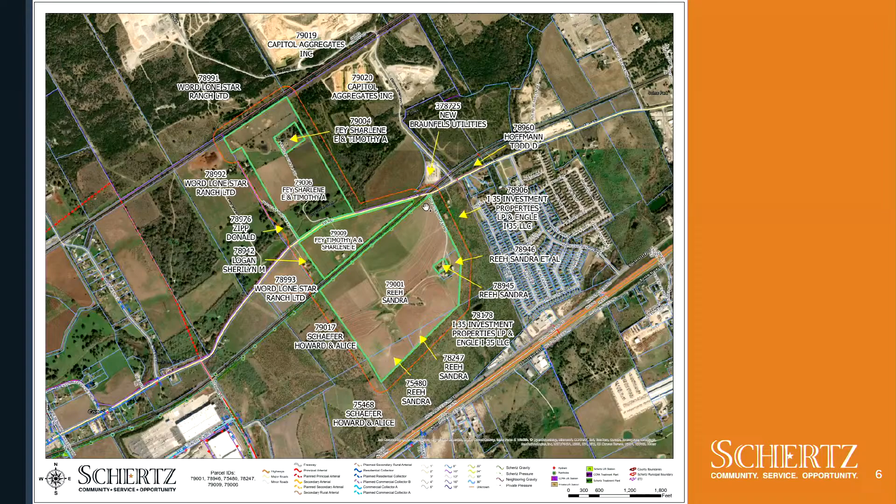There is currently no development plan for these properties. Again, it's just based on them being annexed in July and they need a zoning district established. So there are those properties. This is FM 482 to get your bearings. And then the properties here, I have another picture of it here, shows it a little clearer.

On September 19th, 9 public hearing notices were sent. We've received 3 responses in favor, and signs were placed on FM 482 on September 20th.

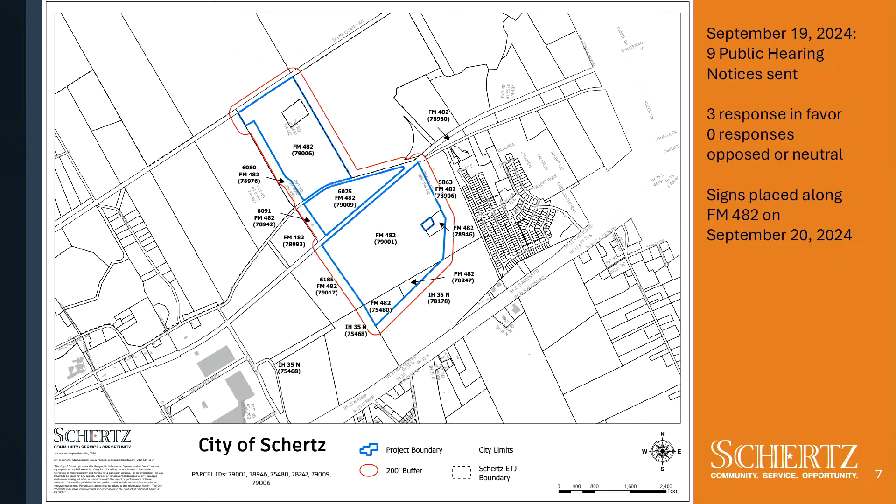So the proposal is agricultural district, which is consistent with the rest of the properties that were annexed in July. You can see the rest of the agricultural districts here that were annexed. And then, as I mentioned, part of that development agreement is the residential homestead being left under a development agreement. So that's where the DVL here is, and then this section here.

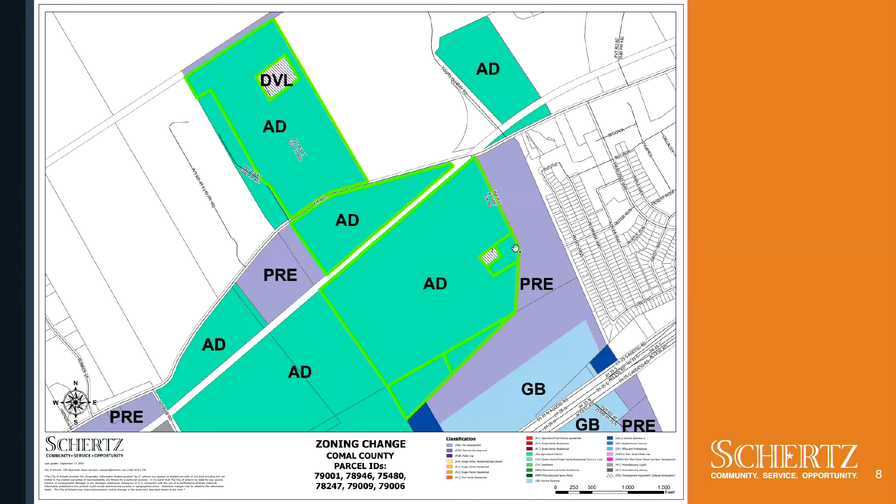So just like all the rest of the zoning cases, we look at 21.5.4.D for the criteria for approval. Number 1, whether the proposed zoning change or zoning map amendment implements the policies of the adopted comprehensive land plan, including the land use classification of the property on the future land use map.

So these properties do have 3 different land use categories. 79006 is development deferment, 79009 is local corridor, and then 79001, 78946, 75480, and 78247 are all regional corridor. Although the subject parcels have different comprehensive land use plan designations, the proposed agricultural district is consistent with the comp plan. It's also consistent with the adjacent properties and what's existing on the properties as well.

Number 2, whether the proposed zoning change or zoning map amendment promotes the health, safety, or general welfare of the city and the safe, orderly, efficient, and healthful development of the city. The city should encourage development compatible with surrounding uses, utilizing standards and transitional uses to alleviate negative impacts. The agricultural district that is proposed as that base zoning allows for agricultural and residential uses. Again, that is what these properties are being used for today.

Number 3, whether the uses permitted by the proposed change in zoning district classification and the standards applicable to such uses will be appropriate in the immediate area of the land to be reclassified. The subject parcels are currently utilized for ag, so the agricultural district is appropriate along with the properties around it.

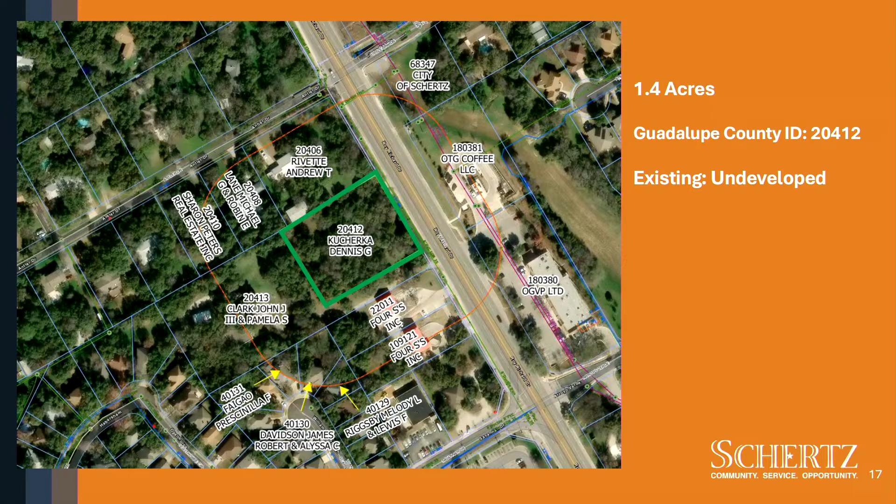So here's the subject property outlined in green. It is located along FM 3009, also known as Roy Richard. It is approximately 1.4 acres and it is located in Guadalupe County. And it is currently undeveloped.

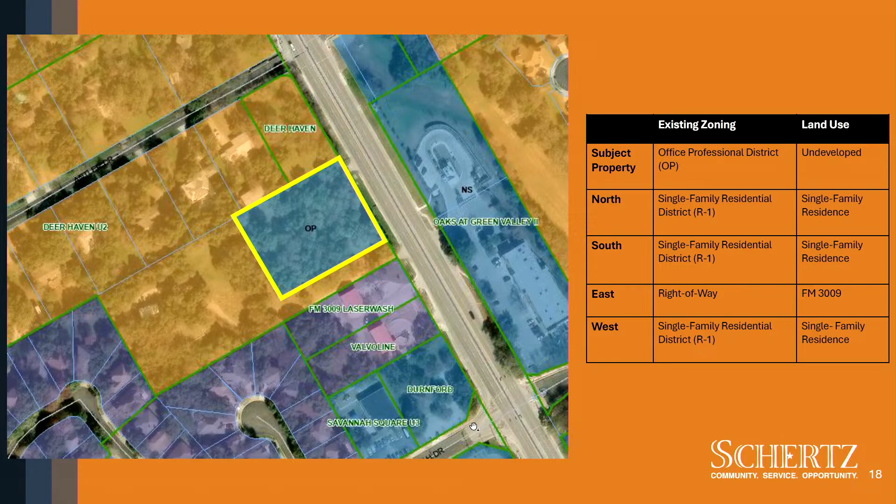Here it is again outlined in yellow. It is currently zoned Office Professional District, and it is completely surrounded by properties zoned single-family residential district that are currently being used for single-family residences. To the east is the right-of-way known as FM 3009, also known as Roy Richard. All the way up to the north is Antler Drive, and down to the south is Savannah Drive.

On September 17th, we sent out a total of 12 public hearing notices. As of October 1st, we received one in favor from the applicant, and one sign was posted on the property. It will also be posted in the San Antonio Express before City Council, and it will be tentatively scheduled for the November 12th City Council meeting.

Just so you know, you're not having deja vu. This was previously applied for a proposed zone change for the same subject property, for the same acreage, from Office Professional District to Neighborhood Services District. The Planning and Zoning Commission held a public hearing in May 2024 and made a recommendation for denial with a 5-1 vote to City Council, but the applicant withdrew the application before it could be heard at City Council.

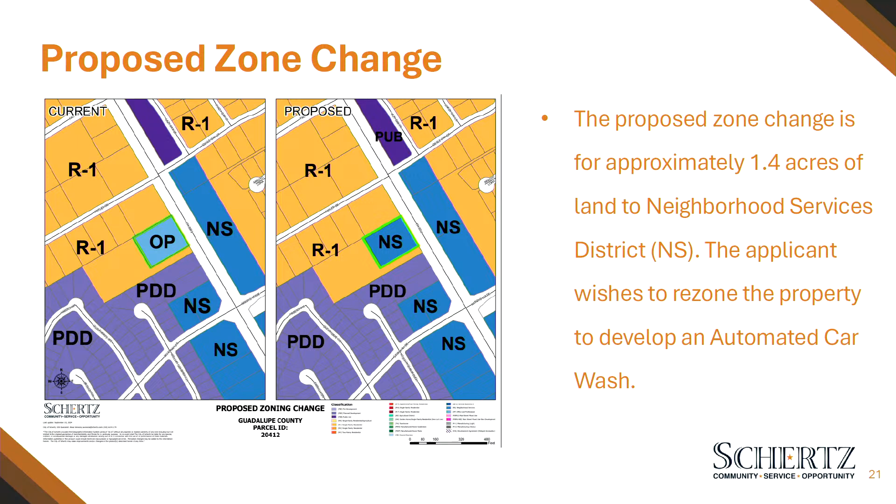The proposed zone change is for approximately 1.4 acres of land to Neighborhood Services District, and the applicant wishes to rezone the property to develop an automated car wash.

So again, staff goes through UDC Section 21.5.4.D, the criteria for approval for a zone change, and I'm going to go through those. One, whether the proposed zone change or zoning map amendment implements the policies of the comprehensive land use plan, including the land use classification of the property on the future land use map.

The subject property, outlined here in yellow with the star, is classified as local corridor, and staff believes that Neighborhood Services District does not implement the policies of the adopted comprehensive land use plan. This is because local corridor land use designation is meant to contain conventional retail centers, small-scale mixed use, multifamily development, and residential uses that are of scale and intensity compatible with the surrounding neighborhoods.

To the north, west, and south of the subject property, the properties are single-family residential district R1 and are used for single-family residences. To the east of the property is FM 3009, the subject property's only current access point. Although the subject property is located on FM 3009 and has that access, it is completely surrounded by single-family residentially zoned properties that are currently used for single-family homes.

I did confirm before this meeting that this property owner owns these 2 lots and uses them as one single lot, and he uses it for his home as well. As a result of the subject property being nestled within the single-family residences, the proposed zone change to Neighborhood Services District is not compatible.

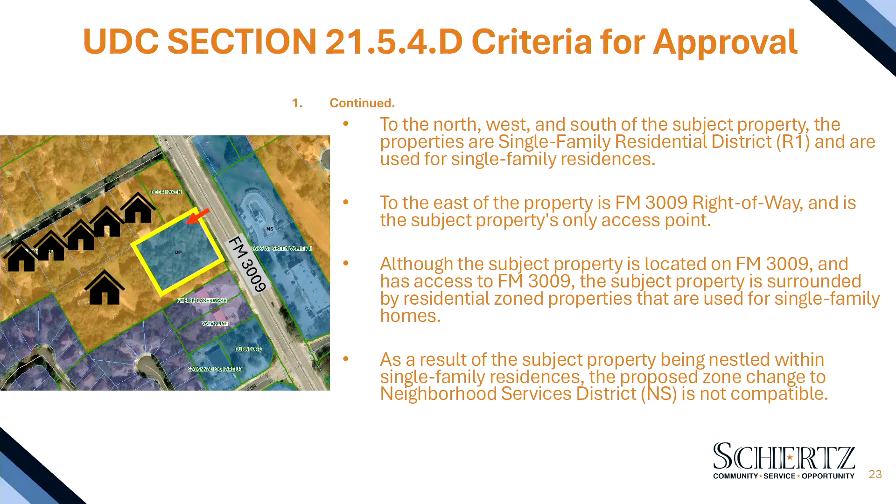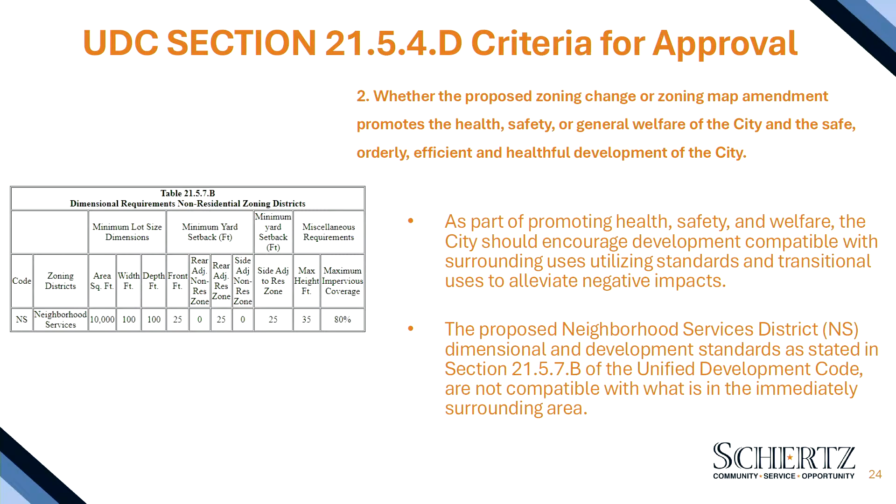Two, whether the proposed zone change or zoning map amendment promotes the health, safety, or general welfare of the city and the safe, orderly, efficient, and healthful development of the city. The proposed Neighborhood Services District dimensional development standards, as stated in Section 21.5.7.B of the UDC, are not compatible with what is in the immediately surrounding area. The existing Office Professional District is more compatible with the immediate surrounding area, as it is the least intense commercial zoning district we have currently.

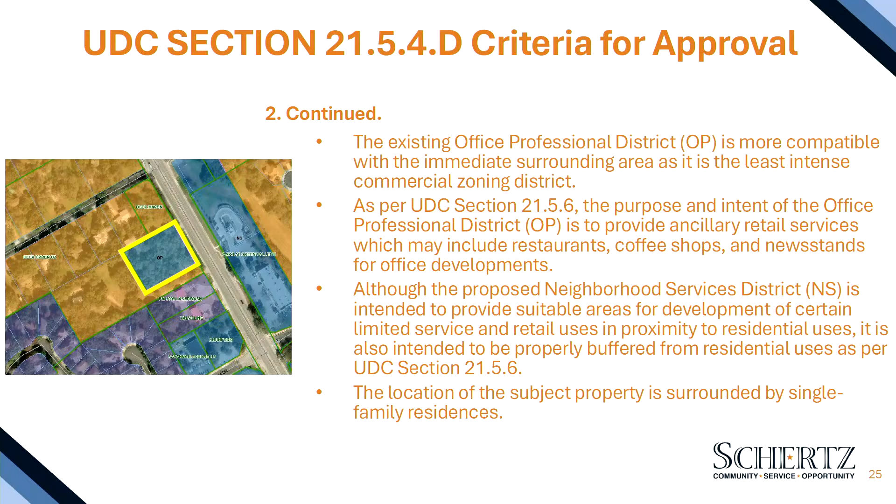As per UDC Section 21.5.6, the purpose and intent of the Office Professional District is to provide ancillary retail services, which may include things like restaurants, coffee shops, and newsstands for office developments. Although the proposed Neighborhood Services District is intended to provide suitable areas for development of certain limited services and retail uses in proximity to residential uses, it is also intended to be properly buffered from residential uses per UDC Section 21.5.6, but the location of the subject property is completely surrounded by single-family residences.

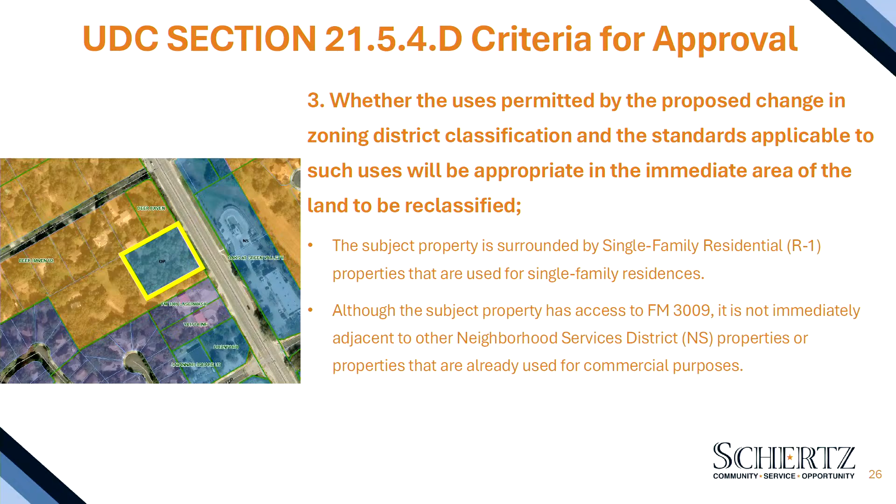Three, whether the uses permitted by the proposed change in zoning district classification and standards applicable to such uses will be appropriate in the immediate area of the land to be reclassified. Again, the subject property is completely surrounded by single-family residential district properties that are used for single-family residences. Although this subject property does have access to FM 3009, it is not immediately adjacent to other Neighborhood Services District properties or properties that are already used for commercial purposes.

Criterion 4: whether the proposed zone change is in accord with existing or proposed plans for providing schools, streets, water supply, sanitary sewers, or other public services and utilities to the area. The subject property and surrounding area is serviced by the City of Schertz for water and sewer, and along FM 3009 there's an existing 12-inch water line and 8-inch sewer line.

FM 3009 is a TxDOT road classified as a principal arterial with a planned 120 to 130 foot right-of-way width. The subject property has an existing curb cut on FM 3009, but any proposed driveways will need to be reviewed by the City of Schertz Engineering Department and TxDOT.

The City of Schertz Police, Fire, and EMS departments have reviewed the proposed zone change. The police department expressed concerns regarding the potential number of vehicles within the automated car wash, in relation to stacking on site and potential traffic flow issues, including overflow onto FM 3009. The applicant did not submit a conceptual or proposed site plan with their zone change application submittal, so we could not respond to the police department's concerns.

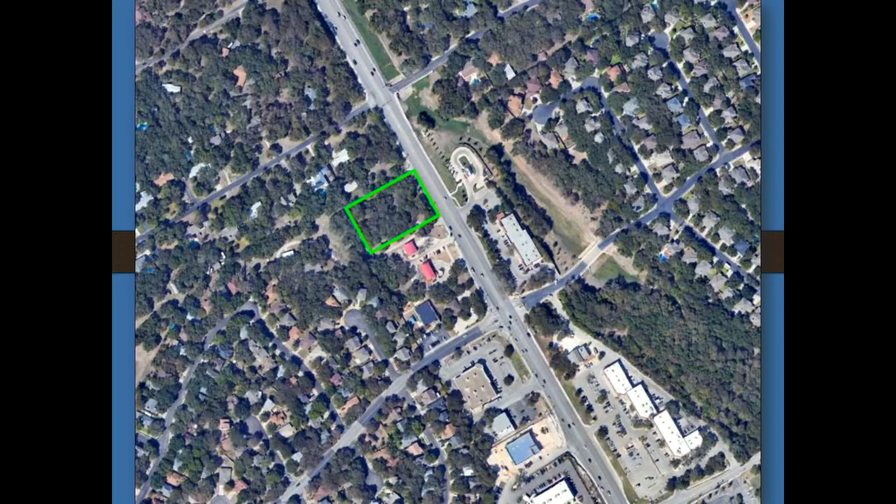As far as the zoning, and as was mentioned several times, almost every slide was that we're surrounded by residential uses and residential zoning, which technically we are surrounded on three sides by residential zoning, but that I really don't think tells the whole story. As you see here, the residential zoning to our south is a driveway that was created for the home that's set back pretty significantly off to our rear, off to the west. That has been in place since these properties were subdivided and kind of broken up way back when. It is not a home by any means, although it is a driveway to a home.

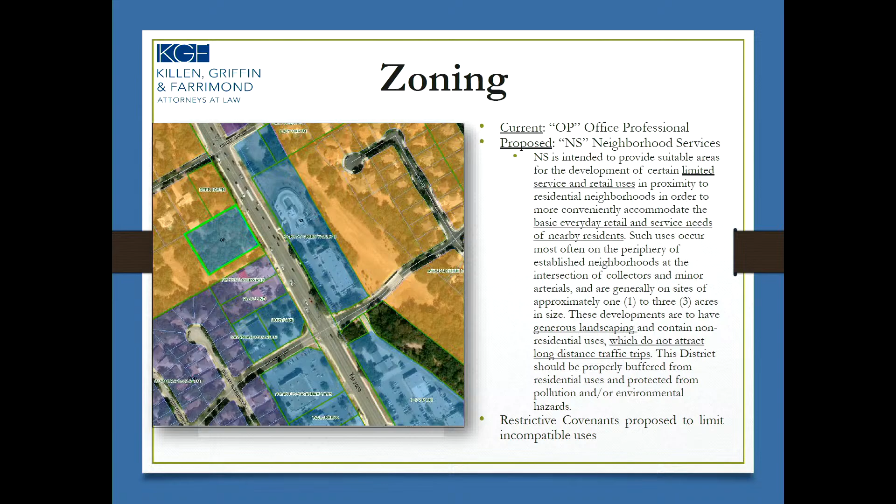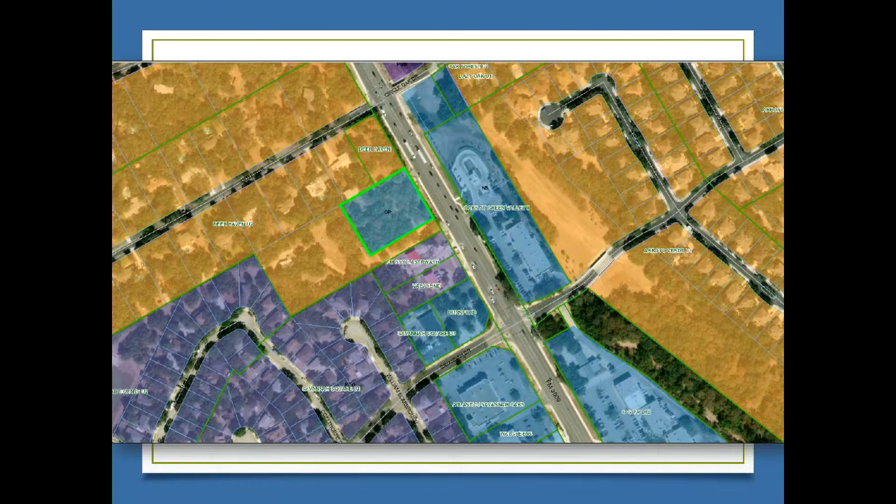There you go, looking at the zoning map again, you see, although we have orange all around us, really what's more definitive, or representative I guess I should say, of the area of this property and surrounding properties is neighborhood services, commercial retail that supports the neighborhoods setback further off.

So here are some actual details, and this is our more technical site plan. Have a better illustration to show the buffers and landscaping proposed as well. But you see here, small building, 4,000 square feet in total, 26 parking spaces, plenty of room, and really they design it to make sure that even at its busiest, there's no stacking anywhere close to the driveway, and they have good circulation and run an efficient operation there where you're really only there for a few minutes.

I mean, it is. I go through one actually probably once or twice a week on my way into the office every morning. It's a 5-minute detour that gets the car clean.

Maybe some of the more important details here: all around the perimeter there'll be a 20-foot minimum landscape buffer, a significant amount of trees and other landscaping going in on all 4 sides. The code also requires an 8-foot masonry wall where abutting residential, so because of that residential zoning district we abut on all 3 sides, even though there's not homes everywhere on each of those sides, 8-foot wall, 20-foot landscape buffer.

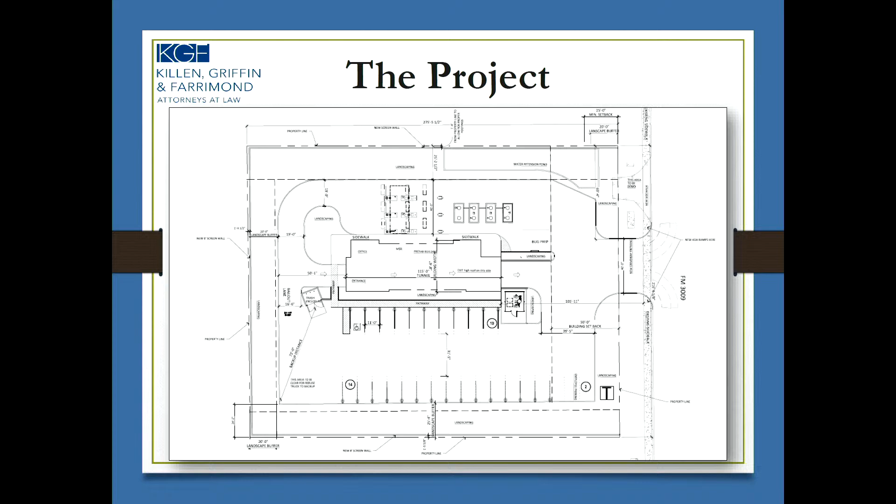Basically, you will not be able to see this use in any regard from the neighborhood, from adjacent properties. That grade really adds some additional buffers in addition to the landscape buffers, again 20 plus feet. So really kind of who you would want as a neighbor if the site is to be developed.

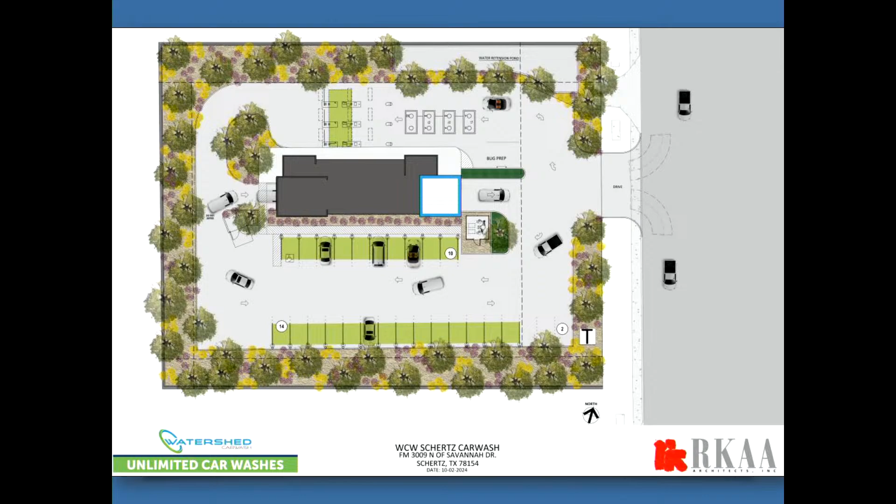Here's a better picture of it, kind of showing what those buffers look like all around, as well as the landscaping throughout, up against the tunnel itself, and tree preservation and additional planting really everywhere we can, but most importantly along the entire perimeter of the site.

A little bit more details: about a 4,000 square foot building, express car wash, 120-foot tunnel. You have 24 vacuum stalls. Rarely are they ever all full at one time.

Hours of operation: they open up at 7 a.m., they close at 7 p.m., or earlier if the sun goes down. Basically it's the earlier of 7 p.m. or when the sun goes down. When they close, the site is secured, the lights are off. If there ever is the need for lighting, it is all dark sky compliant, downward lighting. But again, everything shuts off really when the sun goes down.

Couple quick items on environmental benefits: currently over 50% water is reclaimed. WCW, Watershed Car Wash, has just engaged, embraced some new technology. If this gets approved, this will be one of the first sites in the area to use this, and it's basically 100% water reclamation. Right now the typical car wash spends 50 plus gallons for each car that is washed.

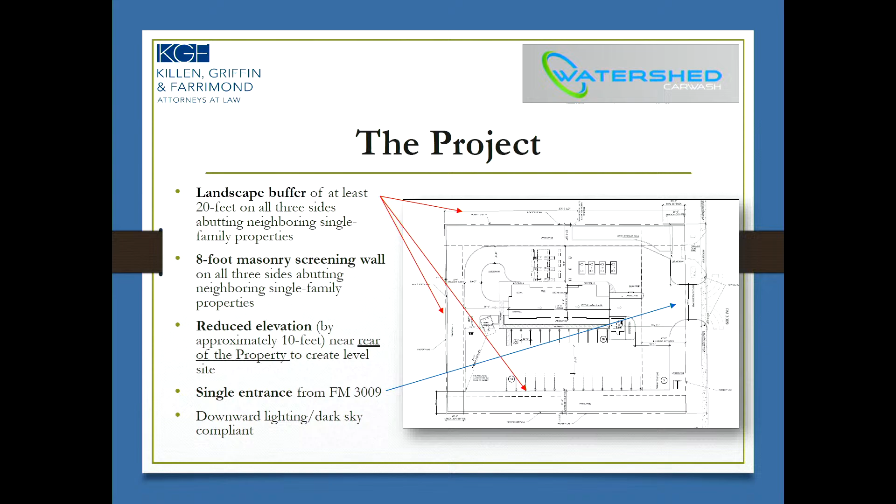Here are more of the back details, probably already went over so won't dwell here too long, but you can see where those buffers are, where that 8-foot masonry wall is, and just how well buffered we are, both from the primary arterial of 3009, as well as residential areas kind of off to the west.

Here's what I mentioned earlier: there is some concern about some potentially undesirable uses that are otherwise allowed in neighborhood services. We intend to do a car wash, want to do a car wash, and we strongly believe there's a need and that it's compatible. So we're willing to file in the deed records that'll run with the property, regardless of who owns it in the future, however many years down the road, that you can't have maybe what might be considered some of those more intense uses like auto parts sales or even a drive-in, group home, convenience store, those sort of things.

That's my last slide, so happy to answer any questions. Really appreciate y'all's time and willingness to reconsider this.

This, again, not to repeat myself too much, but this really is a compatible use. FM 3009, as I think was mentioned earlier, one of the quotes from the future land use plan focusing on 3009 is that it serves the local needs of residents and the surrounding neighborhoods. And that's what we're trying to do here. That's the neighborhood services zoning that we're requesting, and that's the use that we're requesting as well. It's a low intensity use, again serves the neighborhood, consistent with the neighborhood plan, significant landscaping, buffering, masonry wall.

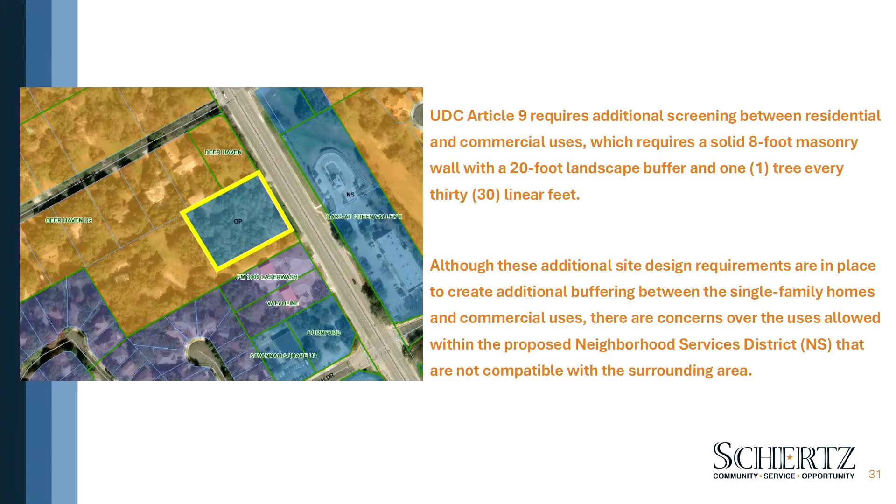But I think another thing to point out, Commissioner Wallace, is even if you look at the properties across 3009, sure they're neighborhood services, but the residential is just to the rear. This is one of the few properties on 3009 that has residential on a side. So the neighborhood services make sense if residential is just to the rear, it acts like that buffer between 3009 and the residential. But this property, it may seem like it's just surrounded by residential, but that is a key piece that differentiates this being office professional versus the neighborhood services on the rest of 3009.

Okay, y'all, just a general question. So let's say the office professional was kept, can you do a conditional use? So could you do an office professional with a conditional use for car wash, or a conditional use for a specific item? So we would have to rewrite the UDC for something like that. That would be something y'all would have to request if that's something you want staff to look into. Okay, so you're stating now that we couldn't make a conditional use. So we couldn't do a conditional use currently?

As the UDC is written, neighborhood services is where car wash automated is allowed by right in a zoning district. If you want us to amend the UDC so that we permit with an approved specific use permit, car wash automated within office professional district, then we can look into that UDC amendment. Yeah, Clay, I think you're looking too deep, the answer you're getting is no. A car wash is not allowed in OP, there's no specific use permit. Correct. Okay, okay.

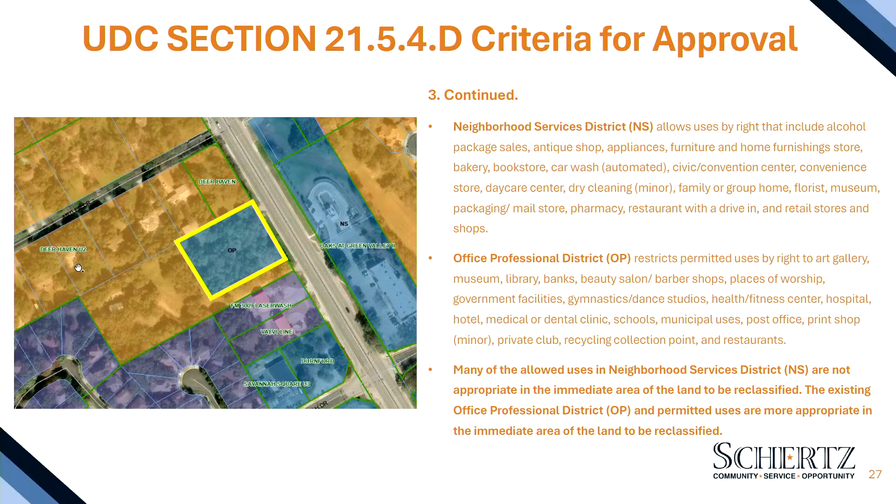So it's two residences it affects: the one that owns the corner lot of Deer Haven, and the one home that's way set back off to the back, with a long driveway. Is that correct? So this driveway belongs to these people, and then this individual, and then these people as well.

Let's see if I can pull up the buffer map. So all these people are within the 200-foot buffer, and these people also as well within that PDD.

So the previous car wash that's now the inspection station for Take 5, that also had those residences to the rear and had the driveway. So it was also residential on the back and on the side there.

Well, as she explained earlier, Savannah Square is a PDD, and those two lots, the Take 5 and the Laser Wash, they are part of that Savannah Square PDD, correct? And that PDD specifically allowed oil change places and car washes. That was in the PDD. So that was not subject to city review or approval once the PDD got approved.

And that all was done - well, we moved in '89, but I think the subdivision was probably done around '85-ish. Does that sound about right? Somewhere in there.

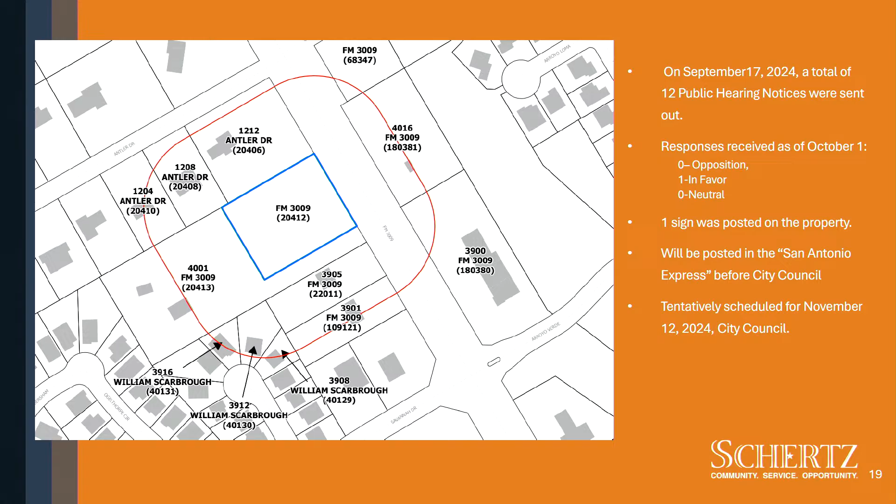Yeah, jump on in here, Audrey. No residents replied to the notices? So not at this time, but they do have until the Friday before the first hearing at council at noon.

That didn't seem to make sense. I'm just saying. So we don't know whether they'll respond or not. Right. Per UDC, we give them until the Friday before the first hearing of council to respond to the public hearing notice. So it's not just like a week or two to respond.

Okay. But not prior to us taking up the zoning. Well, Roderick, I think, sir, one of the differences is this property takes its access right directly from 3009, whereas one of the others we looked at where the room was full of people, the only access to the property was off Antler, I believe - or no, not Antler, the next one. Because Antler is where the traffic light is.

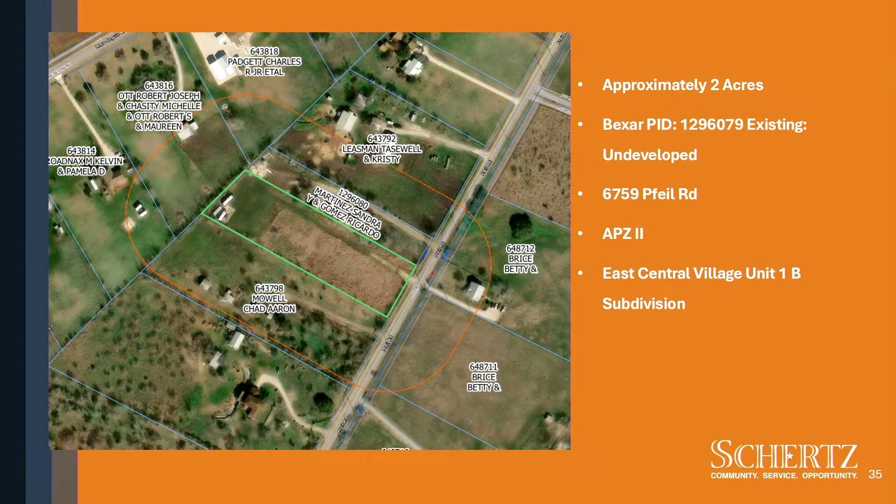Here's the subject property outlined in green, approximately 2 acres. It is currently undeveloped. It is located in the APZ2, and it is currently platted, and it is part of the East Central Village Unit 1B subdivision. It is currently zoned single-family residential agricultural district, and the surrounding properties are also zoned single-family residential agricultural district and are used for single-family residences.

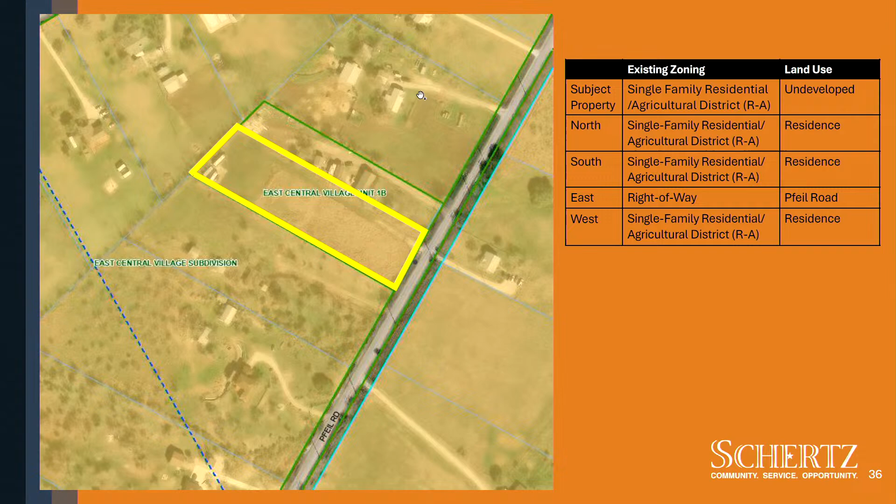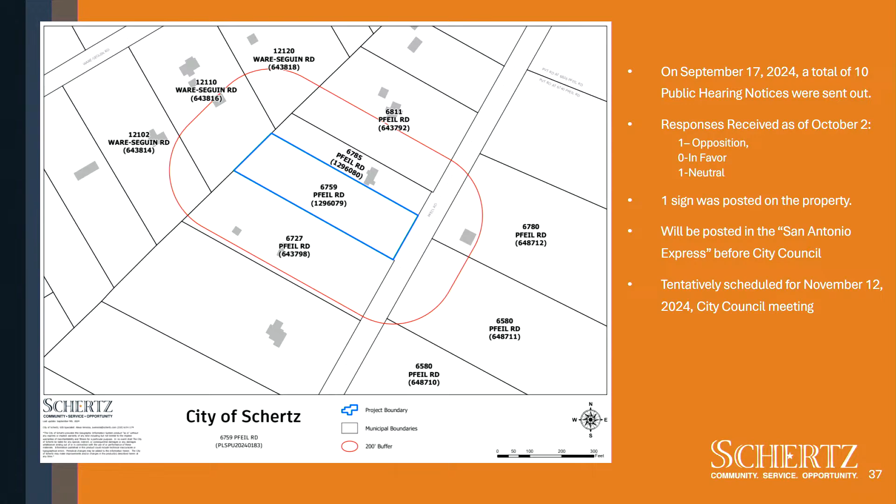And to the east is Pfeil Road. On September 17th, we sent out a total of 10 public hearing notices, and as of October 2nd, we received 1 in opposition, 0 in favor, and 1 neutral. 1 sign was posted on the property by the applicant, and it will be posted in the San Antonio Express before City Council, and it will be tentatively scheduled for the November 12, 2024 City Council meeting.

So the applicant is requesting an SUP to allow a manufactured home on approximately 2 acres of land zoned single-family residential agricultural district known as 6759 Pfeil Road. The subject property is currently undeveloped and is part of the East Central Village Unit 1B subdivision. And as per UDC Section 21.5.8, a SUP is required for the placement of a manufactured home in single-family residential agricultural district RA.

So when we're looking at specific use permits, we look to criteria 21.5.11.D, and I will go through these one by one. So 1, the proposed use at the specified location is consistent with the policies embodied in the adopted comprehensive land use plan. So the subject property is designated as rural living in the future land use map of the comprehensive plan.

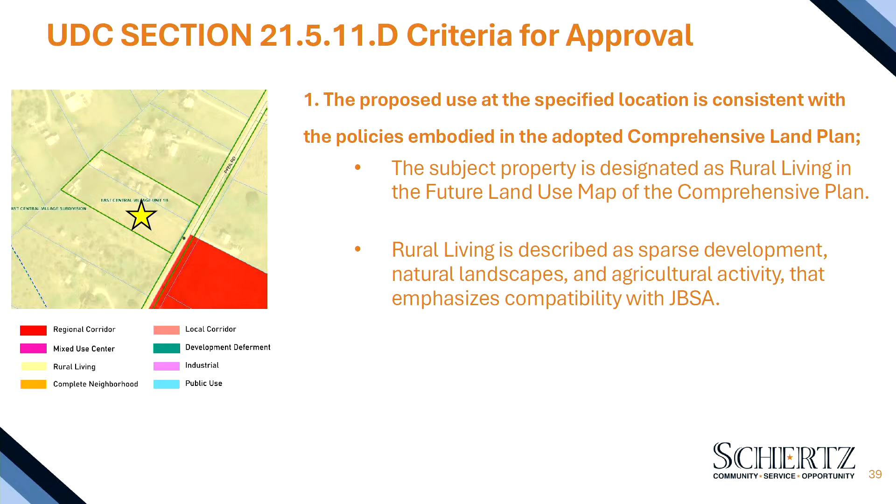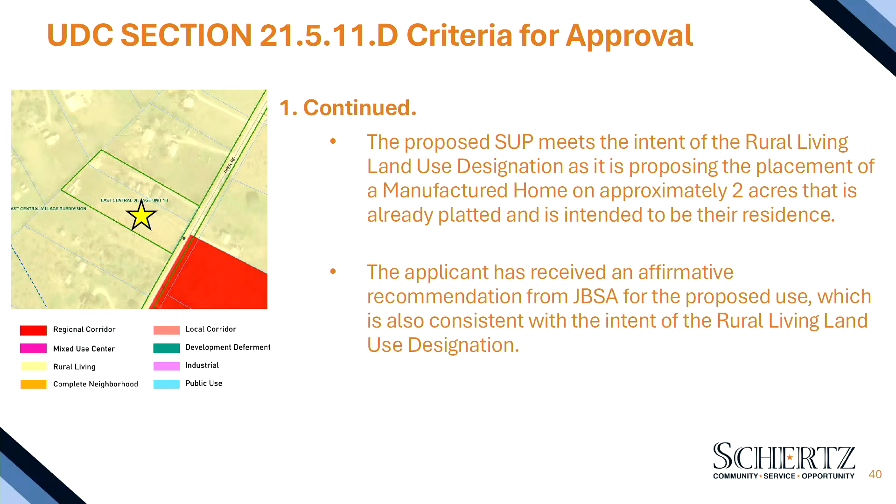Here is the subject property with the star on top of it. So rural living is described as sparse development, natural landscapes, and agriculture activity that emphasizes compatibility with JBSA. So the proposed SUP meets this intent of rural living land use designation, as it is proposing the placement of a manufactured home on approximately 2 acres of already platted land that is intended to be their main residence. And the applicant has received an affirmative recommendation from JBSA for their proposed use, which is also consistent with the intent of rural living land use designation.

So 2, the proposed use is consistent with the general purpose and intent of the applicable zoning district regulations. So the purpose and intent of single-family residential agriculture is to provide areas for which the agricultural land may be held in such use for as long as practical and reasonable, and in areas that are unsuitable for development because of physical constraints as per UDC Section 2155.

The proposed use is consistent with this zoning district, and the use is allowed within single-family residential agricultural district. Due to the location of the subject property within the APZ2, the SUP was reviewed by JBSA, and this SUP did receive an affirmative recommendation from JBSA.

3, the proposed use is compatible with and preserves the character and integrity of adjacent developments and neighborhoods, and includes improvements either on-site or within public rights-of-way to mitigate development and related adverse impacts such as safety, traffic, noise, odors, visual nuisances, drainage, or other similar adverse effects to adjacent development and neighborhoods. So in the surrounding areas, there is sparse residential development along Fowle Road, and the applicant is proposing to use the subject property for the same use as the surrounding properties.

The only difference is that the subject property is proposing a manufactured home, and a manufactured home requires an SUP for placement within the single-family residential agricultural district.

Criterion 4: the proposed use does not generate pedestrian or vehicular traffic which will be hazardous or conflict with existing and anticipated traffic in the neighborhood, because it will also be a single-family residence.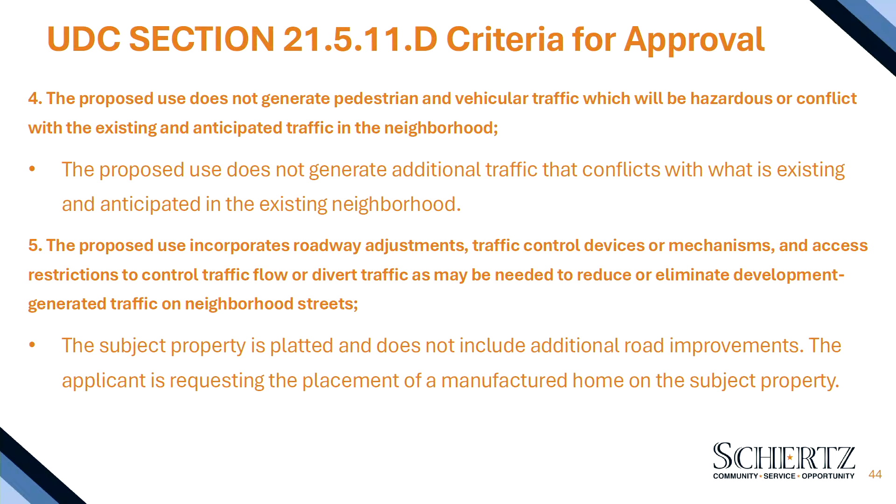The proposed use incorporates roadway adjustments, traffic control devices or mechanisms, and access restrictions to control or divert traffic as needed to reduce development-generated traffic on neighborhood streets. The subject is already platted and does not include additional road improvements. The applicant is requesting placement of a manufactured home on the subject property.

Criterion 6: the proposed use incorporates features to minimize adverse effects, including visual impacts on adjacent properties. The subject property is zoned RA and is adjacent to other RA zoned properties, so no additional screening is required per UDC. If the SUP is approved, the applicant will need to submit all required subsequent development applications to meet City of Schertz development standards.

Criterion 7: whether the proposed use meets the standards of the zoning district, or to the extent variations are requested, that such variations are necessary to render the use compatible with adjoining development and the neighborhood. This development will have to meet all dimensional and design requirements of the single-family residential agricultural district as stipulated in Article 5 of the UDC. The applicant is not requesting a zone change and no variances are being requested, and the zoning is compatible with and matches what is existing in the area.

Criterion 8: the proposed use promotes the health, safety, or general welfare of the city and orderly, efficient, healthful development of the city. The existing single-family residential agricultural zoning and existing rural residential land uses are compatible with the proposed manufactured home. Since the property is located within APZ2, they were required to receive an affirmative recommendation from JBSA. The City of Schertz Fire, EMS, and Police Departments have been notified of the SUP request and have not provided objections.

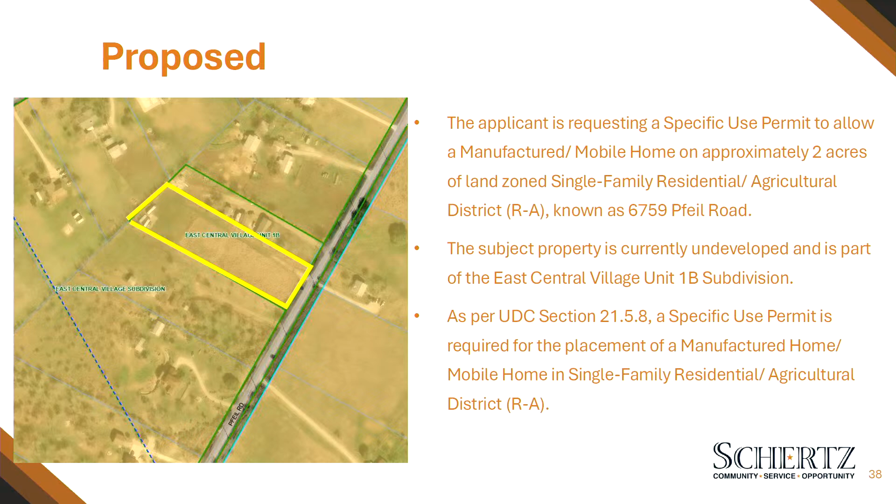I mean, the only comment I had is if we were just told not to consider the car wash when thinking about the zoning, so we shouldn't consider the structure when thinking about the mobile home. Well, it's a little bit different here because this is a specific use permit. So it is about—the zoning is already in place. This is about a specific use permit to allow a specific project. So this is different than what.

But I think the clarification is that, yes, for this you're talking about is a manufactured home appropriate, not the quality or the age of the manufactured home. Right. But in general, can a manufactured home be appropriate there? Correct. I got that. All right, thank you. And a large residential, mostly agricultural lot, yes.

And I'll be honest with you, I haven't been down Pfeil Road in years. When I was actively working in the fire department, I was out there 3-4 times a month. So I really have no idea what it's like out there, but last time I drove down Pfeil Road, what you find are a collection of—some folks have built some really nice homes out there, and other things have been out there for a long time, and you're looking at old farming homesteads.

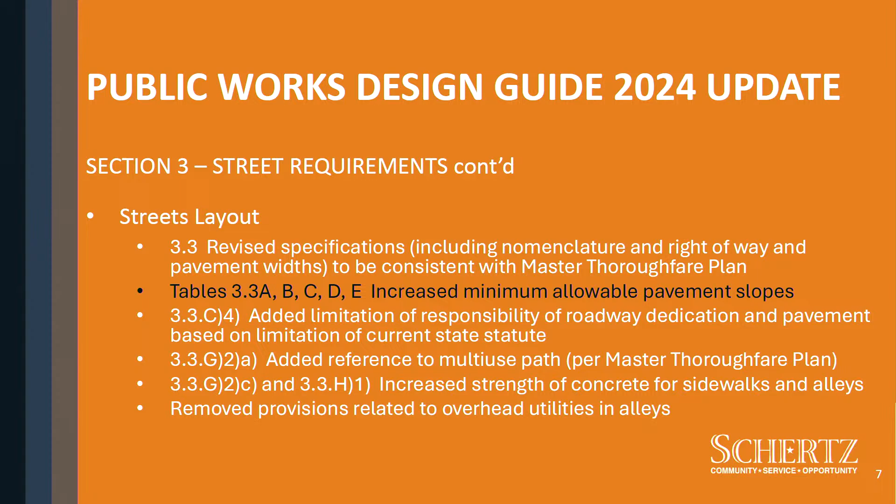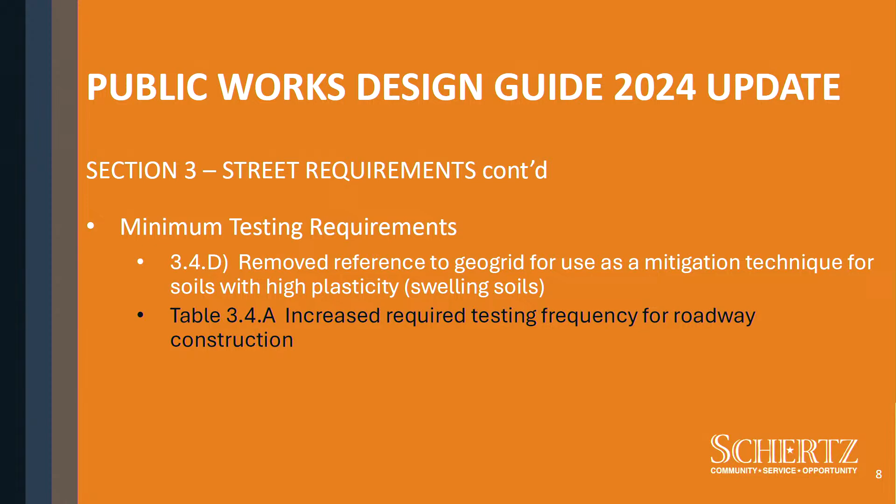We also increased required testing frequency for roadway construction. Increased testing frequency will, of course, mean a higher cost. You get some complaints, but truthfully it's a very nominal cost in the big picture of the millions of dollars of construction costs for roadway construction.

A lot of times what happens is they'll put in a detention basin to control the flow rates—that's a common thing. But previously the water sheet flowed across the property line; now with development, they collect all the water in a detention pond and discharge it as a point source. So previously you had water spread out over a wide area, now it's a point source, which causes problems downstream. We had a hard time enforcing the fact that you're changing those conditions—we didn't really have anything that said you can't change those flow characteristics.

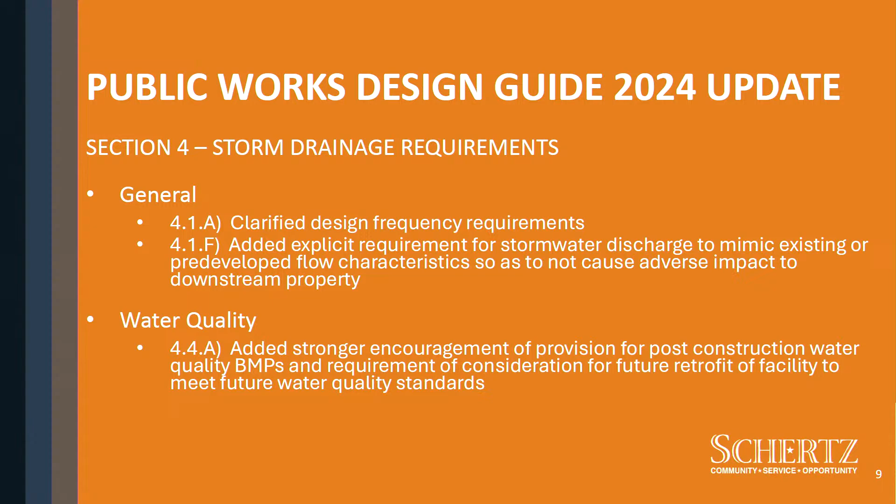This is essentially the same presentation we did in a workshop with council, but we also held a couple of sessions where we reached out to the development community and their engineers and went through it with them. Some of these numbers may not mean a whole lot to you, but they mean something to the engineer designing the facilities—these changes make it a little bit harder for them and make their designs more conservative.

Okay, it does matter to me. Public hearing. Okay, understood.

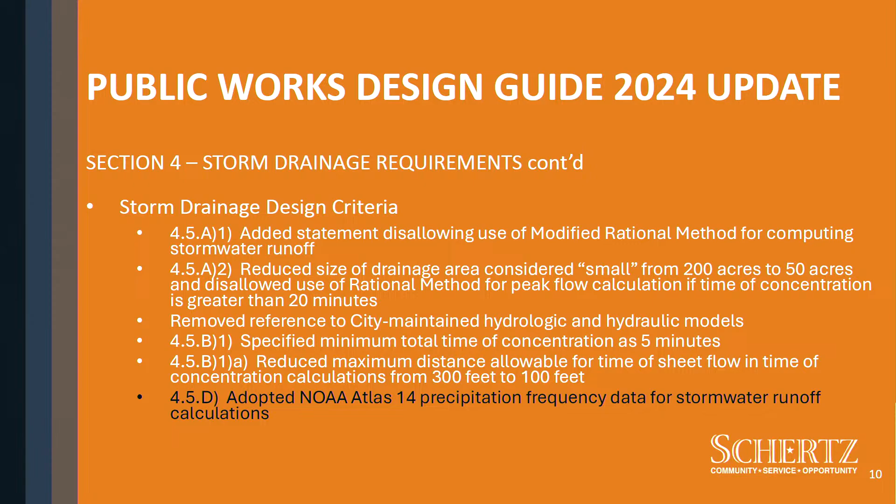A big one, and I put it in bold because it will cost more. It's a higher standard, but it's absolutely necessary. We adopted the NOAA Atlas 14 precipitation frequency data for stormwater runoff calculations, moving us closer to dealing with the storm events we're starting to see, more intense rain, more water in a shorter period of time. So that's a really important one.

We increased design loading of crossings, culverts, and bridges to HS25. It's a little bit stronger than the old standard.

We increased freeboard depths required for channels between 5 and 10 feet. It used to be, I think, 10% of the design flow of the water, and we increased it to a foot.

We decreased allowable earthen channel side slopes from 3 to 1 to 4 to 1, and that is really a maintenance and safety issue. 3 to 1 is incredibly difficult to maintain, particularly for mowing. Larry Bush is in the back, and his guys have turned over many tractors, so that's one that he's really excited to see change.

We decreased channel side slope allowance for railing to be required from 2 to 1 to 3 to 1 for channel depths greater than 2 feet. That's just another enhanced safety issue. We decreased minimum bottom widths of earthen channel, requiring a concrete trickle channel from 12 to 8 feet. Those are all in blue because those are things that will cost the developer a little bit more money, take up a little bit more space, but they are necessary for enhanced safety in most cases in this section.

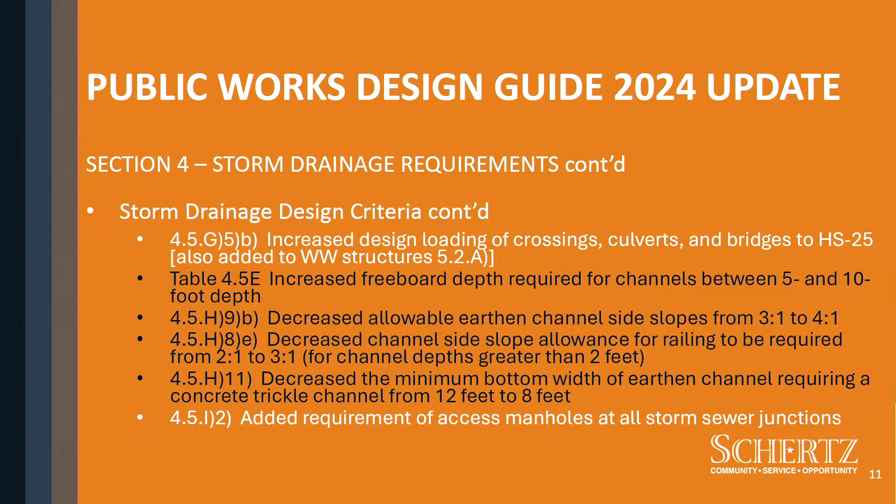We added a requirement of access manholes at all storm sewer junctions.

We added control of the 2-year frequency event to detention facility design. I'm kind of excited about this one, and I always say if I could require the 6 months frequency event, that's what I would require. What happens is a detention pond is designed to control certain frequencies of storms. A 100-year frequency storm is the massive storm that has a 1% chance in any given year of occurring. But the detention pond doesn't do anything to control that runoff from a 2-year storm, which has a 50% chance.

I really need to get my math right before I come in here, I do this every time. In any case, every 2 years essentially it's a big storm, but it happens much more frequently, and so for those events the detention pond does nothing for the water. There's more water now than there was previously during one of those storms. So we're going to control the 2-year frequency event, along with the 5, the 10, the 25, and the 100.

We removed a reference to regional detention facilities. That is certainly a good idea, but it's just not where we are as a community. Each development generally works on its own.

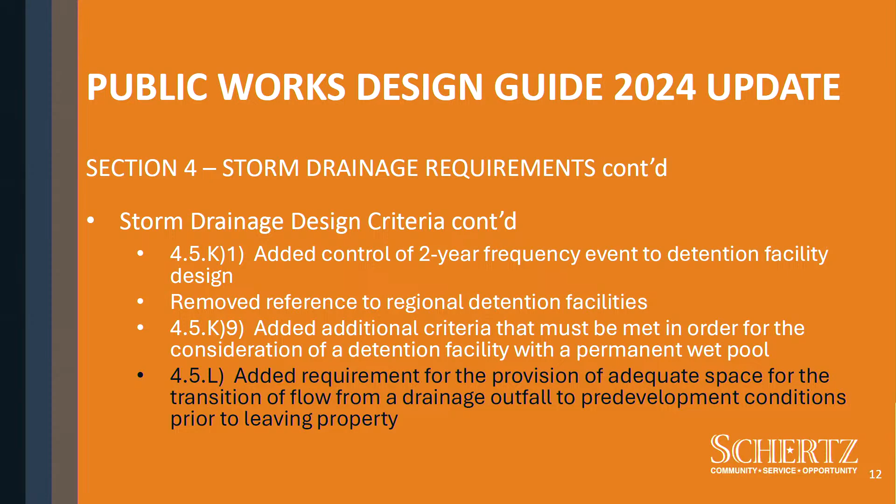We added additional criteria that must be met in order for consideration of a detention facility with a permanent wet pool. We also added a requirement for the provision of adequate space for the transition of flow from a drainage outfall to pre-development conditions prior to leaving the property. That's very similar to the one I talked about before, where we're trying to mimic existing conditions in the post-development scenario.

Moving on to sanitary sewer. We added a requirement of property line cleanouts on all laterals and removed reference to cleanouts otherwise used on public mains.

This is actually a policy that we implemented a couple of years ago. It's working very well, but we hadn't put it into the design guide yet, so it will be in there formally. Another one that we're already requiring, and it's an extremely low cost item, is to add the requirement for a sampling port on all non-residential laterals.

We updated the requirement for flowable fill to encapsulate all manholes. Previously, that was required on manholes that were under pavement. We've been requiring it by policy, and we updated our standard details years ago to require it around all manholes, but now we're going to get it updated in this guide as well.

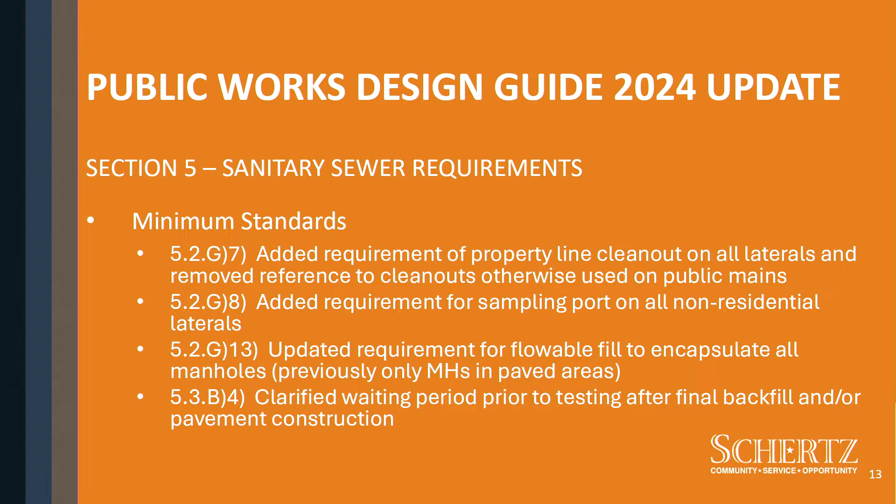We clarified a waiting period prior to testing after final backfill and or pavement construction, and that actually is in line with the technical specifications that are already in place.

Section 6 of the guide relates to water requirements. We reduced the distance required between fire hydrant and structure from 500 to 400, or as required by the fire marshal. Sometimes the fire marshal has discretion in certain circumstances, so this way it's not strict.

We added a section related to private fire lines, limiting the length of a single connection to a public main to 1,000 feet and citing references for design criteria and construction specifications. We added the prohibition of domestic connection to dead-end mains and clarified looping requirements. We clarified the requirement for construction of cross-connecting supply and distribution mains, including those on the water master plans, where the distance to the nearest mains exceeds the minimum.

That's in an effort to build out the grid of the water system and provide redundancy in the system community-wide. We also added a prohibition of combined domestic and fire service lines for private facilities. This is really getting to the multifamily projects where the developers seem to believe, and they could be right in some instances, that it's a more efficient design, more economical to put one line in that can serve as fire protection and domestic.

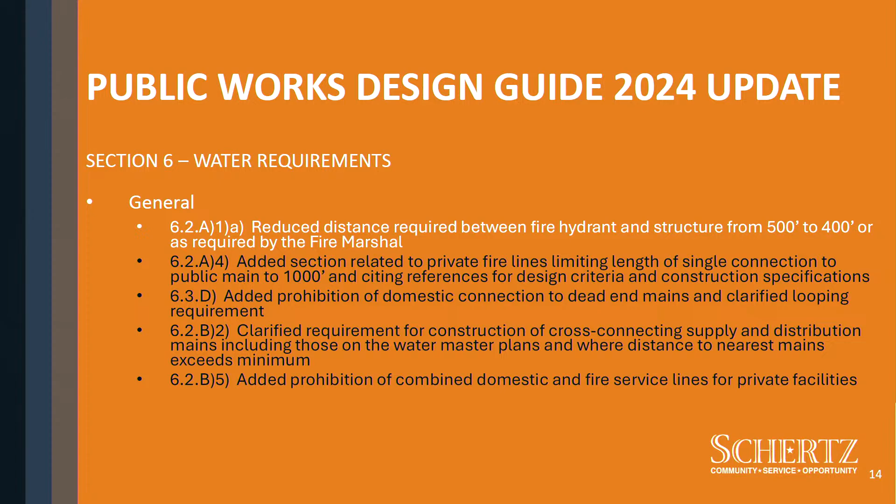Okay, more water design criteria changes. We added a default requirement for encasement of pipe beneath commercial driveways, but we built in specifically a provision for exception based on certain considerations, such as how many other driveways does the facility have, what's the depth of the line, what type of a facility is it, those sorts of things.

And the purpose for the encasement is so that the water line could be accessed without having to close down the driveway in case there's any problem with the water line. We added a requirement for encasement of mains crossing thoroughfare roadways, essentially the same sort of thing.

We added the Storz connection to fire hydrant specification. This is a connection that's needed because of the types of connections that the fire trucks have. And this is another thing that we've been requiring without a problem for several years, but we're formalizing it in this guide now.

We added the requirements and standards for replacement of asbestos cement pipe when new connection is being made or where cover over the main is decreased. It's essentially impossible to tap into an asbestos cement main. They're very brittle and can crumble, cause all sorts of problems.

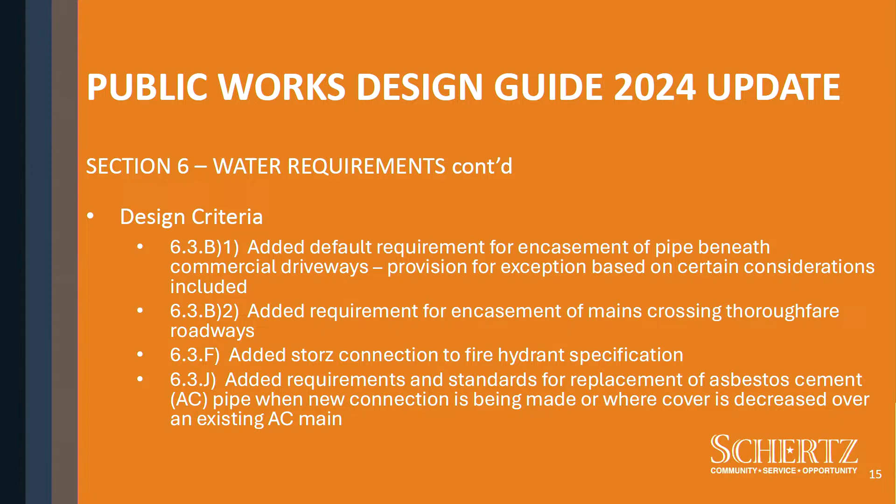So cutting it and trying to make a new coupling to it is not a good idea. So we require the joints to be replaced from collar to collar. And so we're formalizing that.

We have one section at the end of the design guide that is covering inspections and testing. It was previously inspections, testing, and charges. Don't really know how it got to be charges, so we took charges off.

And in response to one of the comments that we got after our outreach meetings, we've updated the guide to specify what assets need to be surveyed, and those are things like manholes, including the tops and the inverts, valves, fire hydrants.

So the sorts of things that we need to know precisely where they are, and if there's an elevation, for example, with manholes, we want to know where those elevations are. Quite frequently, it doesn't get built exactly to plan, and so we want it surveyed after it goes in so that we know exactly what was installed.

And we brought the guide into alignment with the UDC by citing the 2-year warranty period for public improvements. That's been required for several years, but we hadn't updated the design guide yet.

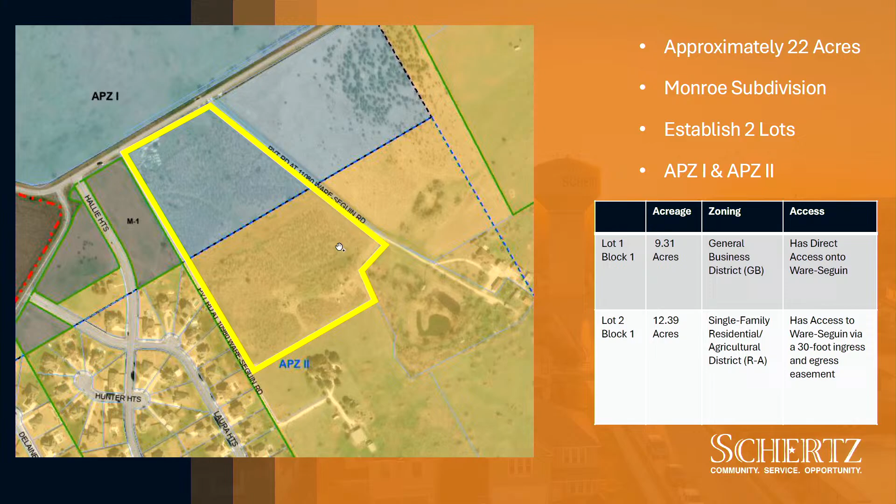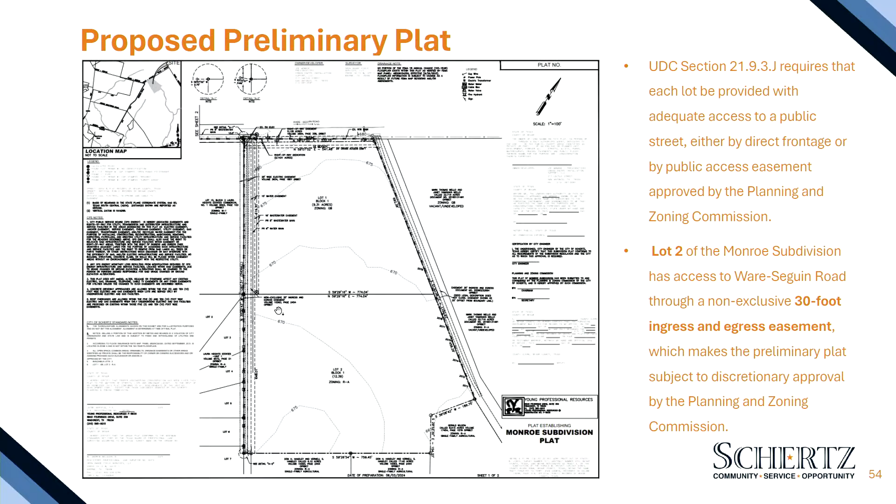So why are we here? UDC Section 21.9.3.J requires that each lot be provided with adequate access to a public street, either by direct frontage or by public access easement approved by the Planning and Zoning Commission. Lot 2, Block 1 of the Monroe subdivision has access to Ware Seguin Road through a non-exclusive 30-foot ingress and egress easement, as you can see by this very small text, which makes the preliminary plat subject to discretionary approval by the Commission.

Any comments or questions, commissioners? Turn your mic on, Clay, please. It's basically just showing the off-site sewer connection because this is the existing closest wastewater connection. Cool, that's it.

Is this subject to any review by Randolph, given its location? So we send the plat application to JBSA Randolph like we do all other planning applications, but since it's not a zoning application, we do not have to have an affirmative response.

Site plan, would they get a chance to look at any resulting site plan? So again, we send every planning application we receive to JBSA for review, but in terms of when we are required per the UDC to get a response back, it's only for zoning applications and SUPs.

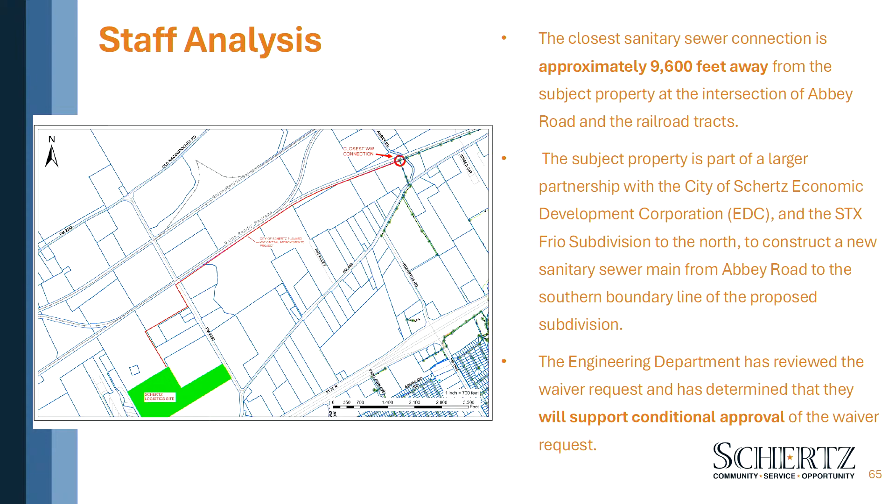The engineering department has reviewed this waiver request and has determined they will support conditional approval. The sewer line will be constructed soon due to this partnership, and once it is constructed, the Schertz Logistics subdivision will be required to connect and extend the sanitary sewer in accordance with Section 9078 of the Code of Ordinances. The preliminary plat submitted demonstrates a 20-foot sanitary sewer easement to meet future tie-in requirements.

Recommendation: approval with conditions. Staff recommends approval of the waiver based on the following conditions: the developer executes an escrow agreement with the City of Schertz to provide funding for the connection to and extension of the sanitary sewer main across the subdivision as generally depicted in the preliminary plat. Once the sanitary sewer main is constructed to the northern boundary of the Schertz Logistics subdivision, the developer will cease OSSF operation, connect to the sanitary sewer, and extend the sanitary sewer main across the subdivision to the southwest corner.

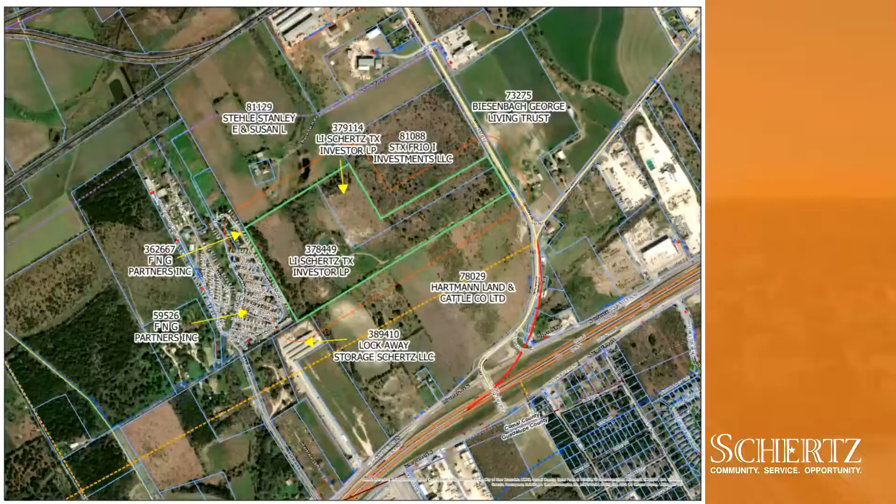Comments and questions? That was quick. I read through mine - so why is this plat for us? Why are we seeing this instead of just staff approving it? Because of the waiver. Oh, okay. So the plat doesn't show the connections to sanitary sewer because they were requesting the waiver. If the waiver technically wasn't approved, then the plat wouldn't meet all of the requirements and we'd be looking at a different outcome. So the preliminary plat is here because of the waiver request, to not connect.

So did I blink and miss it, are you going to show us the plat? I missed it. I blinked. Okay. Oh, yeah. You know what I said about getting old? You remember that, Will? What I said earlier? Thank you, Daisy. That's all right.